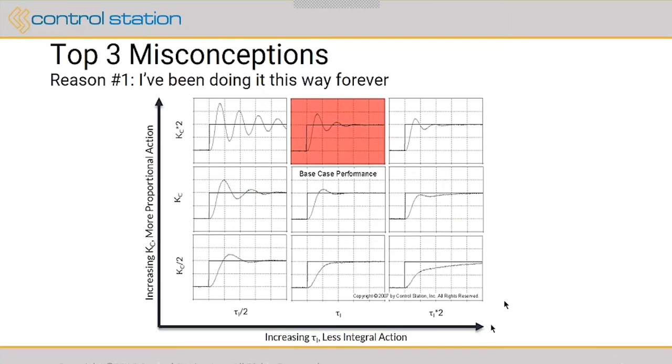So from those choices, we can go on to reason 2. It's saving money. You know, I won't buy the software because it costs money. Yeah, but so I'm going to save the company or save me money by not purchasing the software.

But are we actually saving money? How many loop responses would we need to see to understand and then tweak the values to get good control? And did we account for all the variables? From the previous chart, there were 9 different representations, but most manual tunings can take at least that, if not more, to find the one that works.

Working through those, it's difficult to figure out, well, where does this loop sit in my process? And it can cause you to tune it right, but then you will upset your process. So then you have to adjust for your process. All of these things need to be considered when you're tuning. And it costs time, and you can cause upsets in your process, which can cause impacts on production.

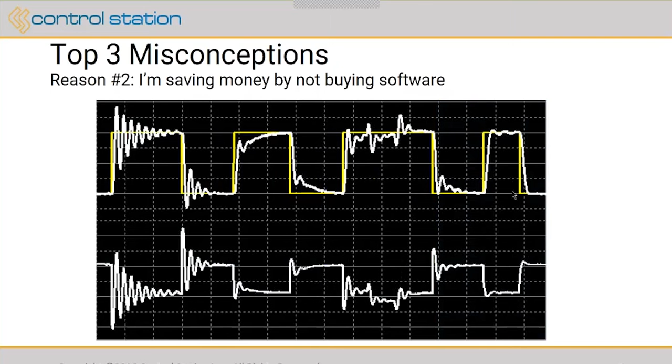And we just clear them out until we finally decide, yes, this is the ideal way we want the process to control, and it's in good control. But as I said, it took us time to get there. That time impacts on people, process, and production.

There were 8 steps in the previous process. It could have taken us 2 minutes, or it could have taken us 2 weeks. But during that time, how many times did we upset process? And how many times did we change process to impact production? They may be very subtle changes, but they're all changes and will change and affect the variability of your process.

So the third reason, I suppose, is software. It can't do it any better. I'm better than software. And it was valid at one time. We've all seen the Excel spreadsheets or the various different software systems that are out there that were attempting to model real-world data, but the real world isn't always Ziegler-Nichols. There's always variability. There's always dynamic processes that change it.

Up to now, software couldn't do it better, but ours can. It does it open or closed loop, so whether you're in auto or manual, it will model it. And again, some processes are critical, and you won't be allowed to go to manual, so you must do your step changes in auto. Again, that's not a problem. Our software can detect either mode and work properly.

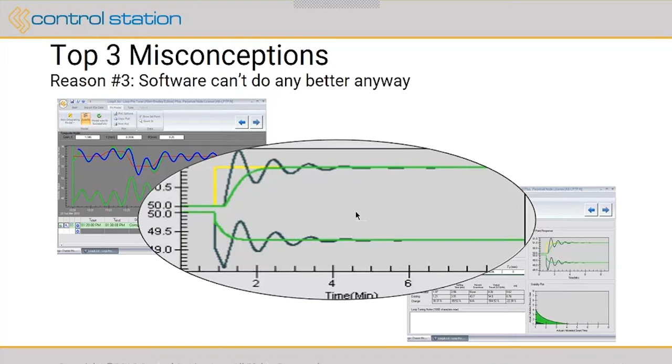Also with it, we get this analysis to show the recommended control and the existing control and the difference between the two in stability, in settling time, percentage overshoot, amount of output travel, and the last column there is integrated average absolute error, which is the amount of error we've had over time. So they're all very important parameters or reflections of what the model has given us and how we get what we get from it.

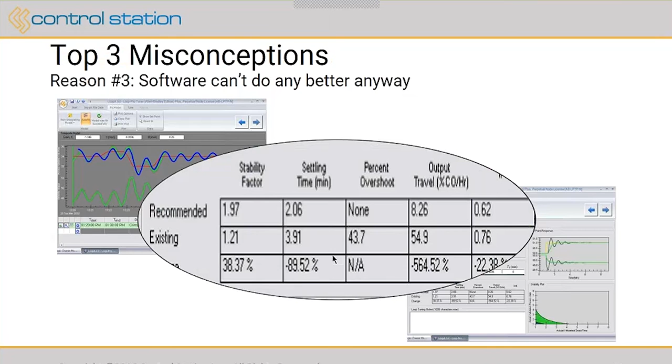So with the software, say, okay, well, prove it to me. How do we know it works? So let's go through some of the case studies. We've got 4 case studies here: a cogen system in the University of Alaska, Haverhill Chemicals, which is an overhead tower pressure control, an electric desuperheater temperature and steam control system, and in the oil and gas industry, a platform gas preheater.

So let's just talk through a few of these to get some insight into how they used our software and used it to success. So this one is a good example of "we've been doing it this way forever." By the way, as I said, that's not a test rig in the university labs. This is their cogen facility that they're using to cogen for the campus. So it's quite an intensive process.

It shows here the very oscillatory nature of the VFD, and it was constantly hunting to maintain control. We see it was very much traveling up and down or cycling to try and maintain that control. And good control is not always fast and aggressive. Good control needs to do what is needed when it's needed, and getting a good model will give you that decision.

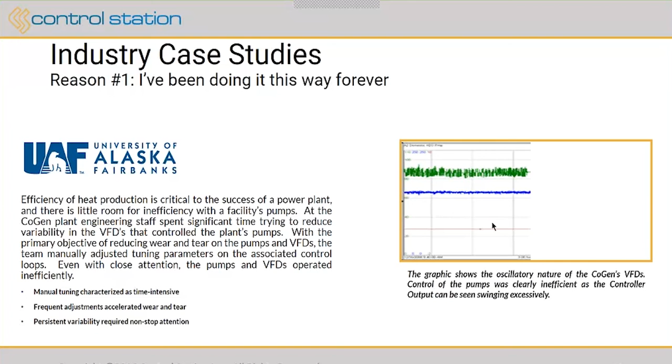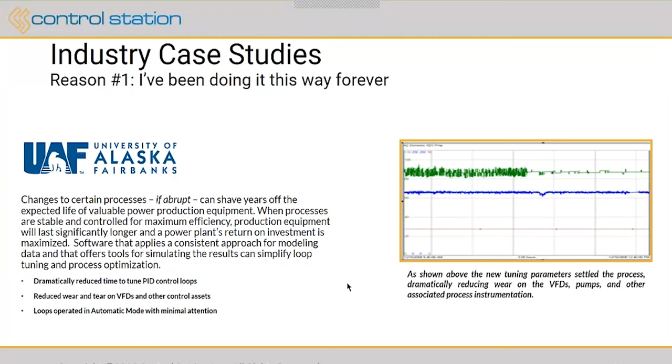And we see here from the result, we radically reduced the amount of control for no huge decay in performance. In fact, you could argue that there's an improved performance over time. And it means much less wear on your equipment, much less wear on your process, much less variability. And again, that's a real key to it, that's money saved over time. When you're looking for return on investment or ROI on these kinds of things, these are all things that count into that.

Next one here is saving by not buying software. This was the overhead distillation pressure on the plant's main tower, and it was very difficult to maintain this pressure. They actually had like a 20% variability on the process, and it resulted in both incomplete reactions and the loss of production material, because every time the valve position would go to about 60%, it would dump its overpressure, as that was the margin of error on the safety system. And you can see there that there's peaks coming up to 60% and causing dips and variance on the process.

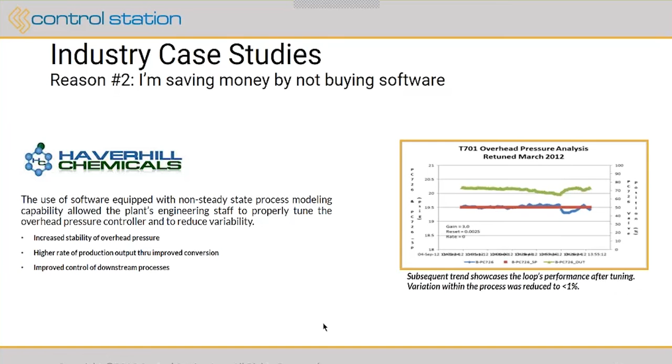When they tuned it, they went from that to this. So it's a marked improvement on the process, and we can see that they had a much more stable process, much more stable overhead pressure, which meant there was a much better throughput of quality product, and improved downstream, because the downstream wasn't seeing those spikes. In fact, their process variance went from 20% to 1%, which is a huge change in process variance.

Reason 3, software can't do it better anyway. So again, on simple systems, you're right, software can't do it any better, but simple systems are very quick to tune, very easy. But on a more complex or a much faster or variable process, it's very hard, I should really say impossible, to do them manually. This one shows that there's a 10 to 12 degree variance in the process, and it was constant variance. They could not gain control.

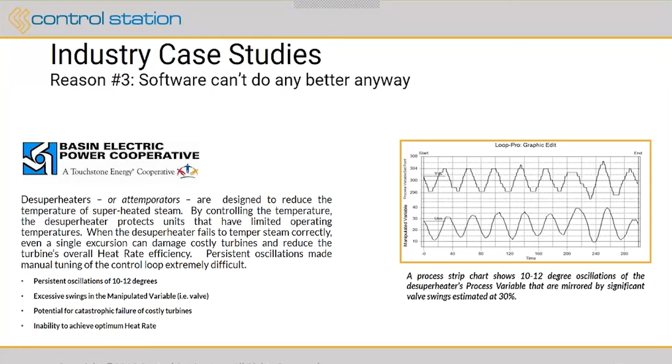They were trying all their tricks to gain control, and it was just getting varying degrees of worse, I suppose. Using the modeling software, they went to this kind of control. And again, if you remember back to the chart on the non-steady state model, very easy for our software to capture that data and model it accurately.

They went to this mode, and you can see from the statistics on the improvements, they went from 4 hours to 1 hour of settling time. It settled much quicker. Now again, if your process had an hour of settling time, very hard to model those processes manually. But the software gives you the information and then gives you the statistics out the back to show how it has improved.

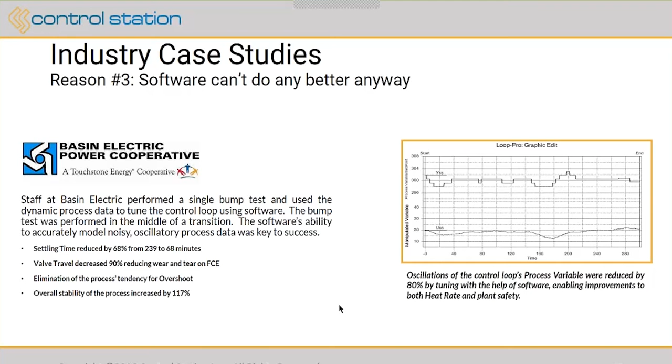The overall stability was increased by 117%. You're not going to have those numbers in the manual mode, but you can see the improvements between those two models. But the software gives you those statistics to see what the improvement is, to demonstrate and to justify your modeling, your step changes, to prove the performance of it. We know our software works. We know you get results from it.

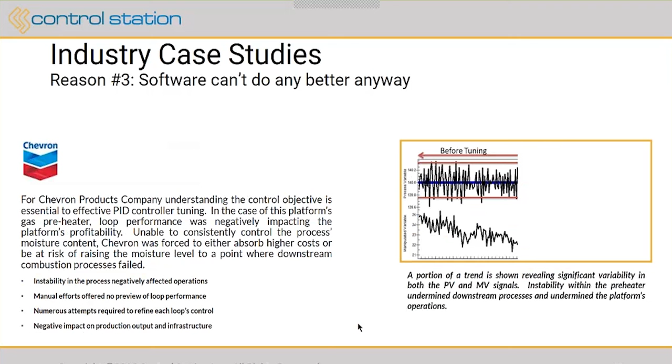The last one we have is a software one. Software can't do it any better? Yes, it can. This is a temperature control on the platform's gas on the preheaters. So there was huge variability on it, constantly cycling the temperature, constantly cycling the moisture content, which meant downstream combustion processes saw this variance and struggled with it. They went from that mode to that mode, and you can see the difference in the variance.

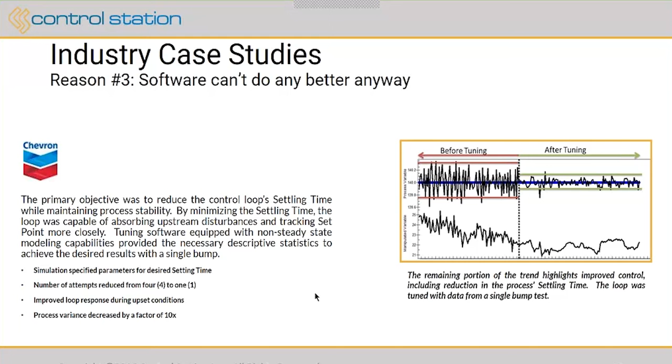So they gained control on their variance, but they also had the ability then to consider reducing the amount of energy required to maintain that position, as they could move up or down the process variance to be tighter to the constraints, because there was a constraint further up the process. So you can see the different improvements that can be gained from the software, but also the tracking and recording the information from very focused models to very specific information, and then the solutions out of the back of the modeling.

You know, this is the black art of tuning. Everybody is afraid to play with it because it works, so don't touch it. But our software allows us to analyze it, understand it, and improve the model, to improve the tuning, to improve the process. And it's all about the bottom line and considerable savings to platform operations. It doesn't matter whether you're a small operation or a large operation, in production 8 hours a day or 24 hours a day. The costs of production are quantifiable, and when you can define the improvements and show the savings, they really add up to ROI, and it's almost a no-brainer on the decision making.